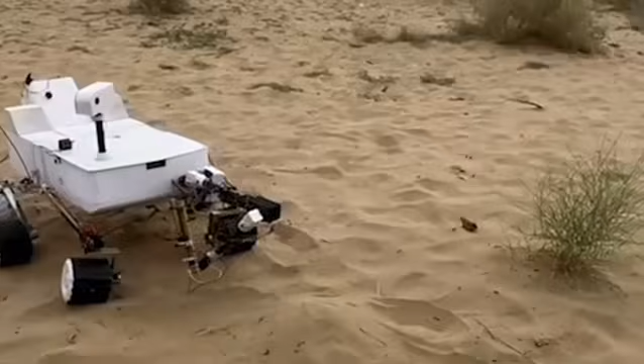In this video, you will see all the real mechanical engineering design steps involved in building a prototype Mars rover, including mathematical calculations, ANSYS simulations, CAD design, and the complete failure analysis and improvement process. This is my final year project, featuring a robotic arm and drilling system inspired by the actual NASA Mars rovers.

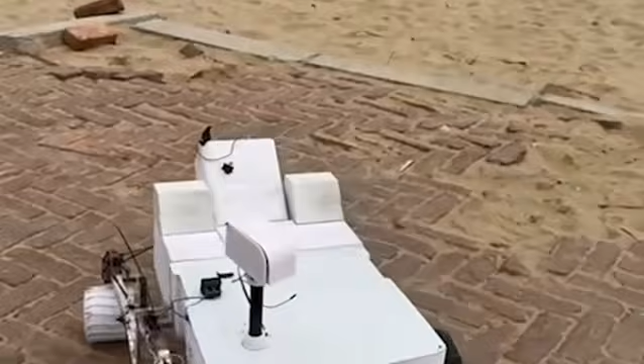The rover is operated through the internet, allowing it to be controlled from anywhere in the world. Let's move toward its design. I created a CAD model of our rover in SolidWorks, designed similar to the Mars rover. First, I made some 2D drawings in AutoCAD and then made the 3D model accordingly.

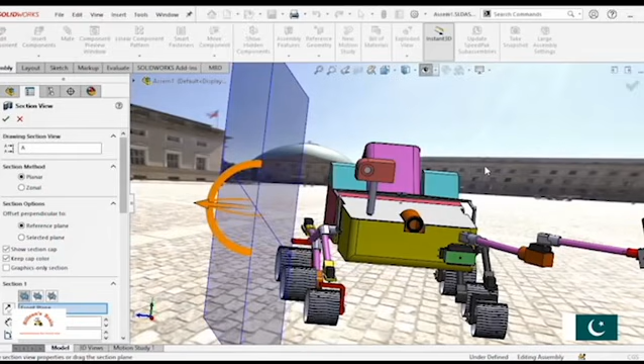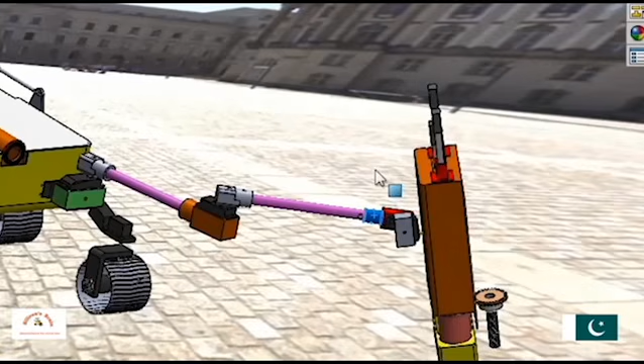This rover has a rocker bogie mechanism with 6 wheels. In the rocker bogie mechanism, all 6 wheels stay in contact with the ground all the time. It has a sample collecting robotic arm with 4 servo motors for movement and 2 DC motors for drilling. There is also a camera mounted on the rover which can rotate clockwise and anti-clockwise.

One important consideration in its design is how much torque is required to rotate the tires. We have the torque formula T = F x r. Two forces act on the rover: the gravitational force and the force against gravity while moving on a slope. By putting in the values, the required motor torque to rotate the tires is 2.25 Newton meters.

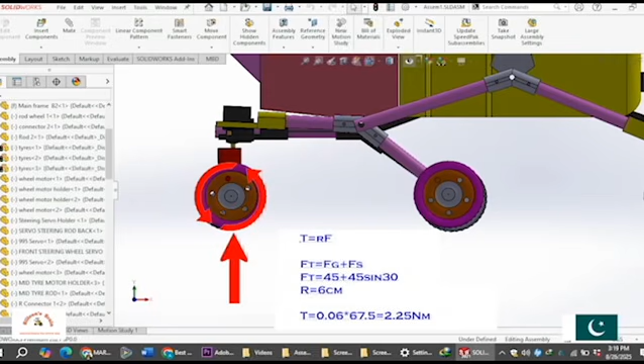I also performed some tests on ANSYS Workbench to check its feasibility. The first test was on the chassis of the rover. The total force applied on the chassis is around 50 Newtons, and since we are making it with stainless steel, it is within its bearable range.

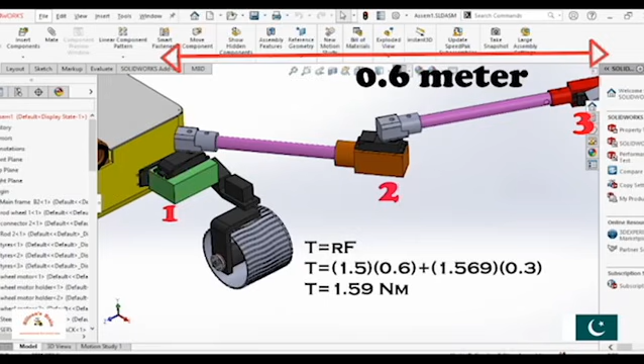Let's move to the design of the robotic arm. We need to find how much torque is required to lift the drill box. The robotic arm is 0.6 meters long and the drill box weight is around 160 grams. By plugging the values into the formula, we get the required torque, which is 1.59 Newton meters.

The second test was on the robotic arm, where maximum load was applied on the second rod of the arm, and it was also in its bearable range. We have successfully completed the rover design. Now it's time to 3D print all of its parts. All the parts were sliced in Cura software and then 3D printed. It takes days to complete.

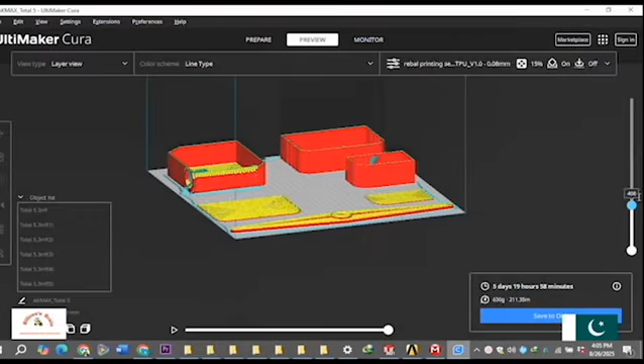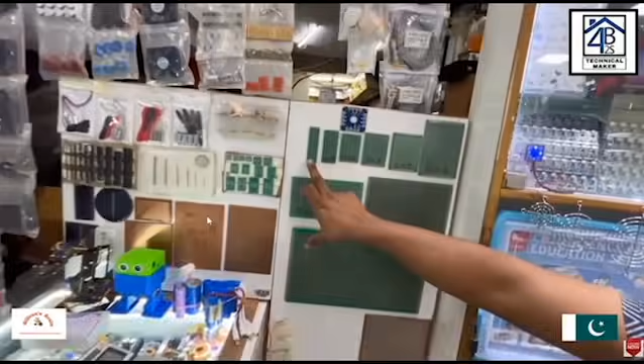Then we went to Lahore to buy all the required components. We bought everything according to our calculations. We also visited some famous universities like UET. We also enjoyed some Qawwali night there.

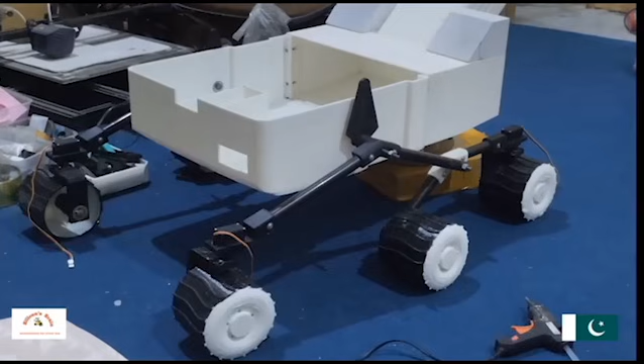Now it's time to assemble the project. First, we joined 2 sections of the body together and then made the chassis of the rover, since there were some plastic connectors in our chassis which started failing in loading conditions.

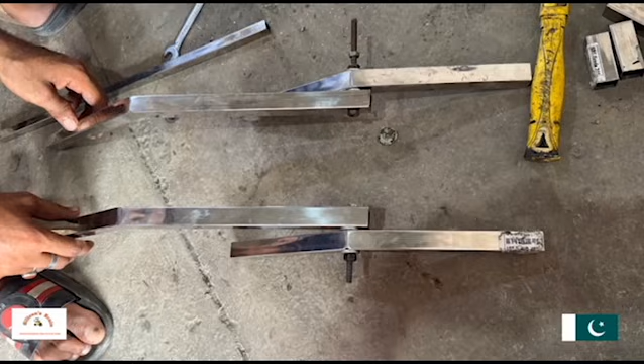We decided to make it with steel. We went to the workshop and made it using stainless steel. It took some days to complete, and then we fixed the body on the chassis. After that, we fixed the robotic arm on the chassis.

Now it's time to move to wiring. I created some wiring schematics in KiCad software. Here we have the wiring diagram of the robotic arm, which has 4 servo motors and 2 DC motors for drilling. We are using Arduino Mega and ESP32.

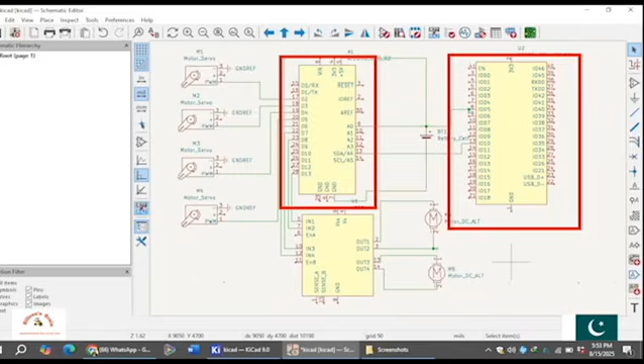By using ESP, we can control the rover from any part of the world. I also created some wiring diagrams in Tinkercad, such as the wiring for the 6-wheel motors. I wired the rover according to those schematics.

Now it's time to program the rover. I wrote the code using AI tools like ChatGPT and then changed the code according to my design. I uploaded the code using Arduino IDE software.

After uploading, I noticed sometimes the robotic arm starts moving very fast or even breaking. So I did some alterations in the code while physically testing, like adjusting the angles of the robotic arm, and in the end the arm was working smoothly.

Now we were done with our project. Now it's time to test. We went to the desert to test our project.

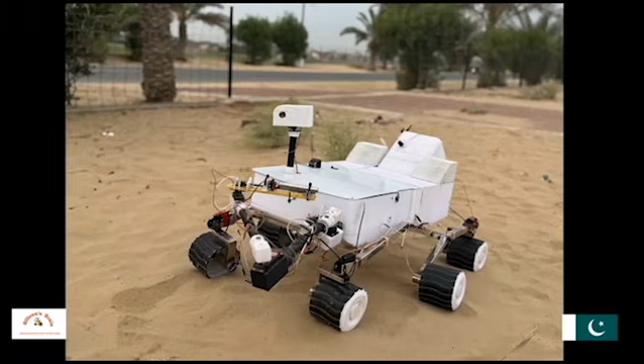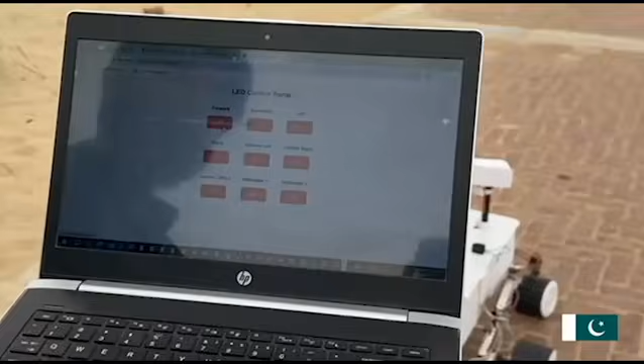In our control panel, we have 9 buttons. 7 buttons are used for controlling the rover, and the remaining 2 buttons will be used for future upgrades. The buttons are named forward, backward, camera left, camera right, sample collect, etc.

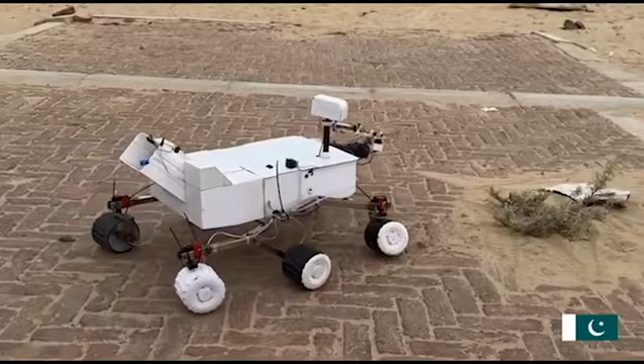By pressing the forward button, the rover starts moving forward, and the same for backward. By pressing the sample collect button, it starts collecting samples. And by pressing camera left and camera right, the camera rotates accordingly.

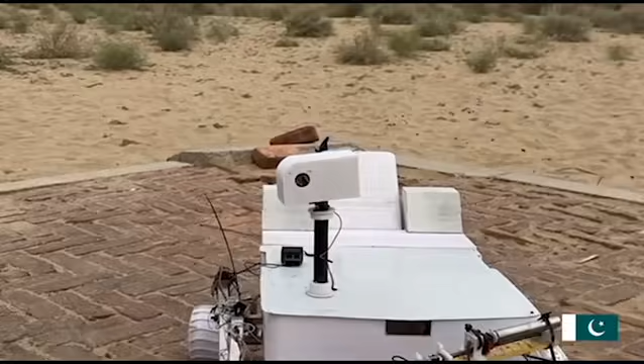This is the real camera recording of our rover.

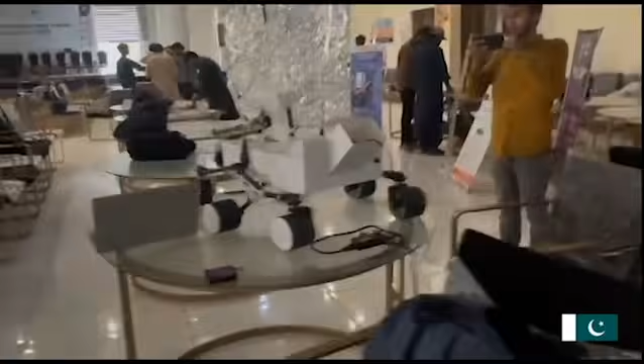We also presented our project in the recent exhibition held at the university, and we are also planning to exhibit our project in upcoming exhibitions across Pakistan. It is a research project and can be used for many geological purposes.

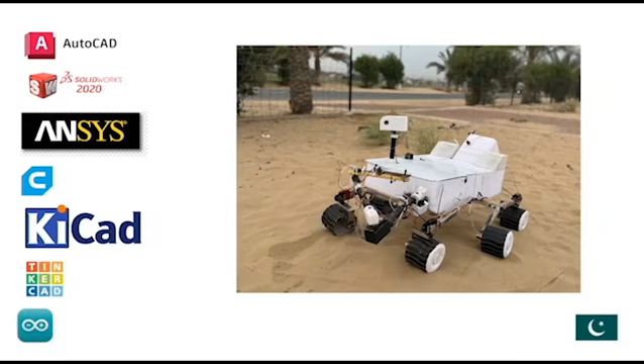This rover helped me learn many software tools including AutoCAD, SolidWorks, ANSYS Workbench, Cura, KiCad, Tinkercad, and Arduino IDE, and also improved my critical thinking skills. I also published a complete research paper on this project. You can check it out. Thanks for watching.